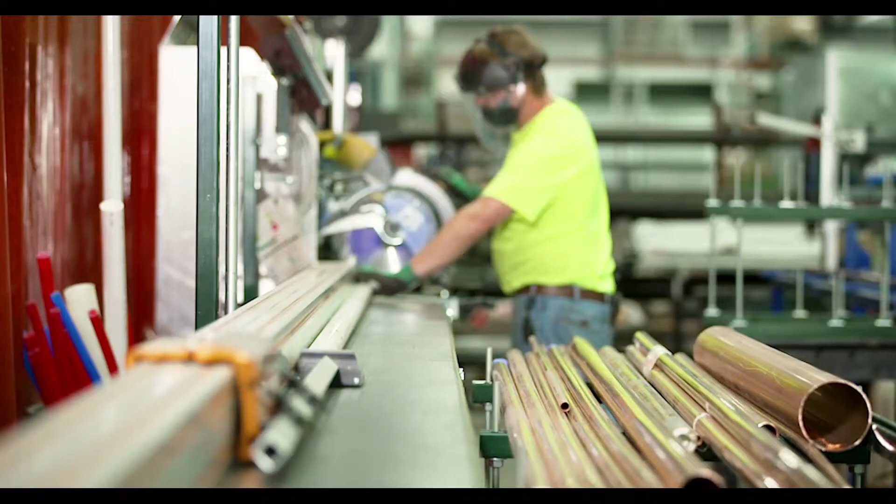So Tweet Garot is a 125-year-old mechanical contractor with approximately 800 employees. We're one of the largest contractors in the Midwest and very proud of our commitment to lean construction and innovation.

We're moving forward under the following premise. You cannot optimize construction until you standardize it, and you cannot standardize it until you productize it. So that has been our focus, creating a database of constructible parts and pieces that contain contextual data that we can add seamlessly into the building model.

Everyone's talking about maximizing prefabrication or off-site construction. Now the buzzword is modular. That's all great, but most of that happens outside the model. An engineer designs it one way, it's constructed or prefabricated by a contractor outside the model.

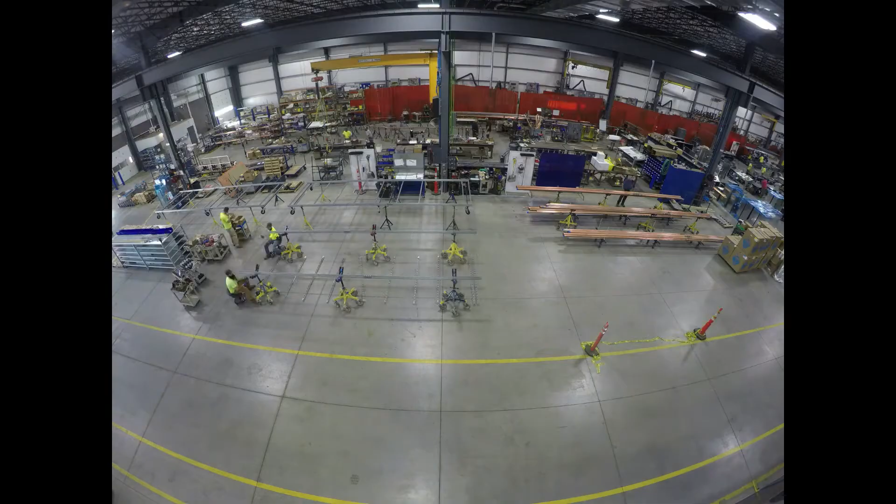The real disruption to our industry will be when a module or a product not only is standardized, but configurable, and then, lastly, with data attached to it, both digital and smart.

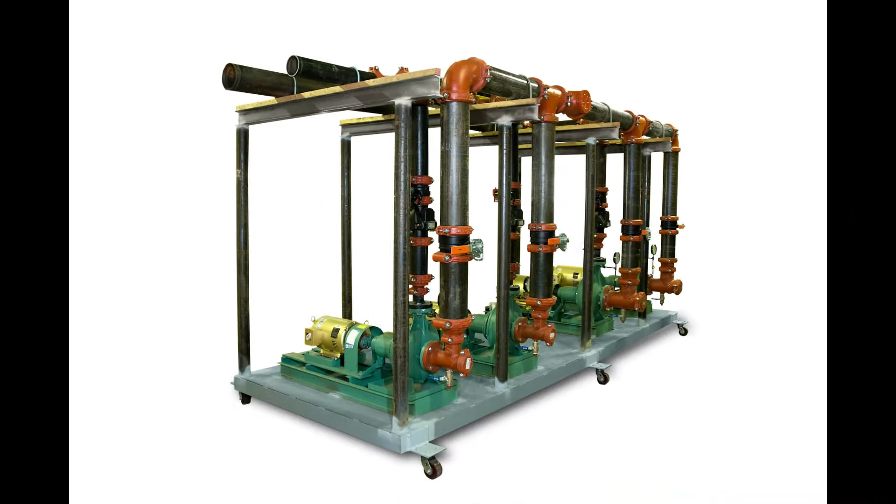When we're starting off with a design build contract, our internal engineers will create the model and then begin to populate it with the design content. They'll add the ducts, the pipes, the VAV families. That will all be generated in-house and placed within the model at that time.

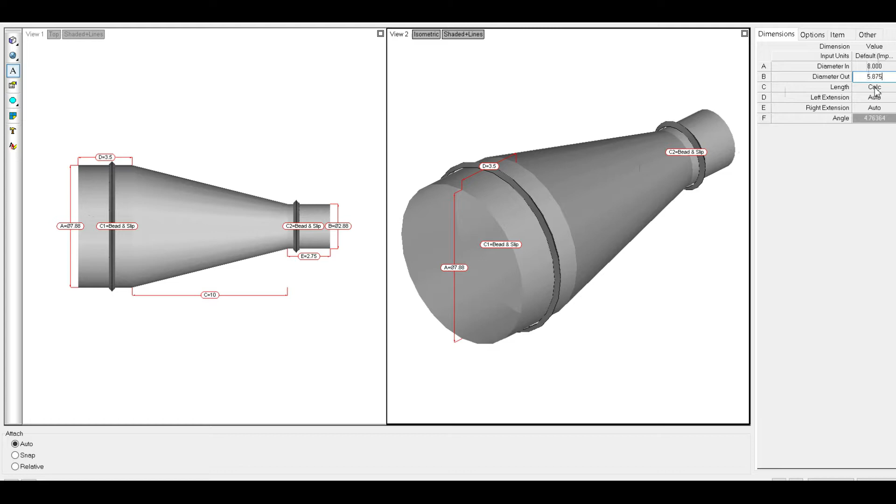Bid spec is the more traditional form of construction, and that is where an external consulting engineer will create a model and begin to populate it with content, usually the same kind of content, but they can put it in different ways and in different locations.

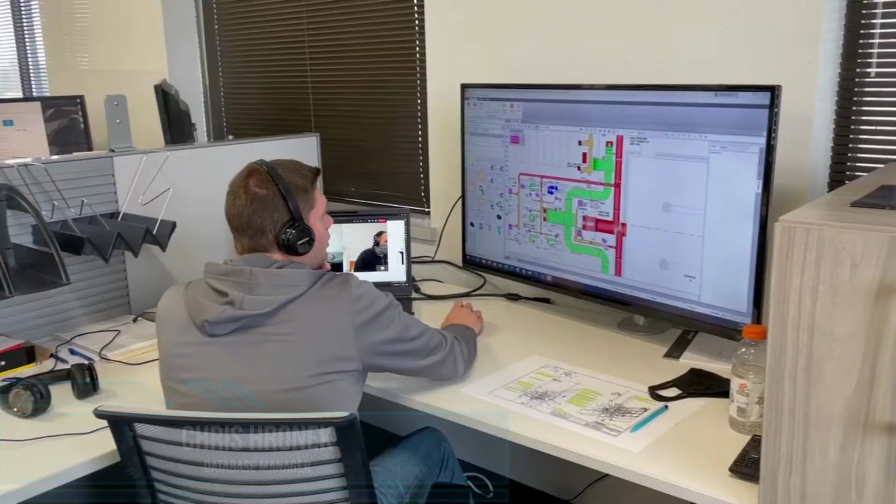We are integrating estimating into the model. We're starting with the idea of this streamlined approach of doing as much as we can with what we get. It just makes sense that we're not rebuilding it, like we've talked about earlier. If the estimators can estimate inside the model, it makes sense. We're using those standard parts and pieces that we've determined and we know work in the estimate. So by having our standard library, we're able to use that standard library to estimate from.

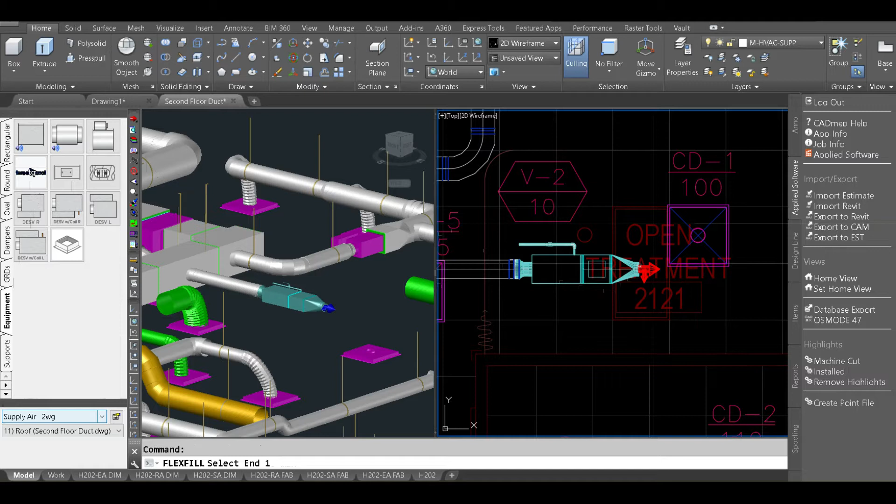So with us building our own parts and pieces and constantly managing and updating them as they go, it allows us to use the same standard parts so pieces can be represented the same each and every time we use them. Us building our own allows us to know that we're using the correct content, and it allows for that seamless data flow.

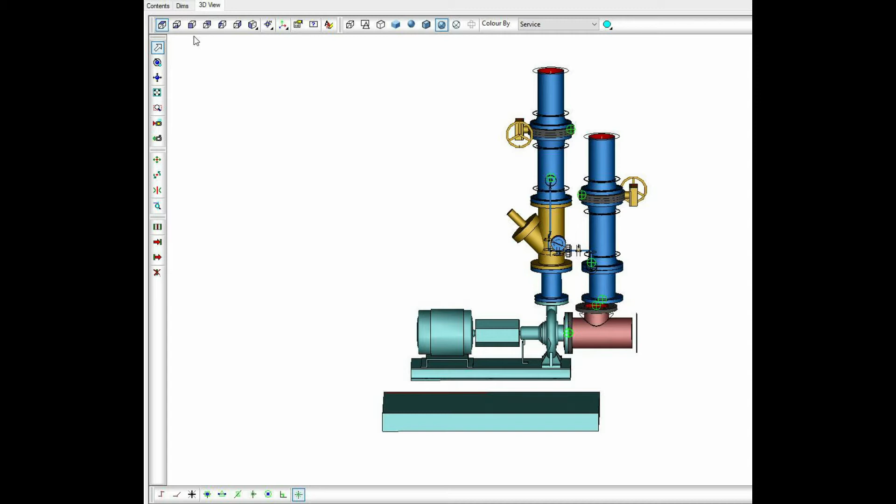For a consulting engineer, their product is that drawing package. So there may be information within the model that is not on the drawing package and therefore not verified by that consulting engineer. So we have to check each line of data, each parameter, and make sure that any information in the model matches the drawings, for information that wasn't necessarily reported out on the drawings.

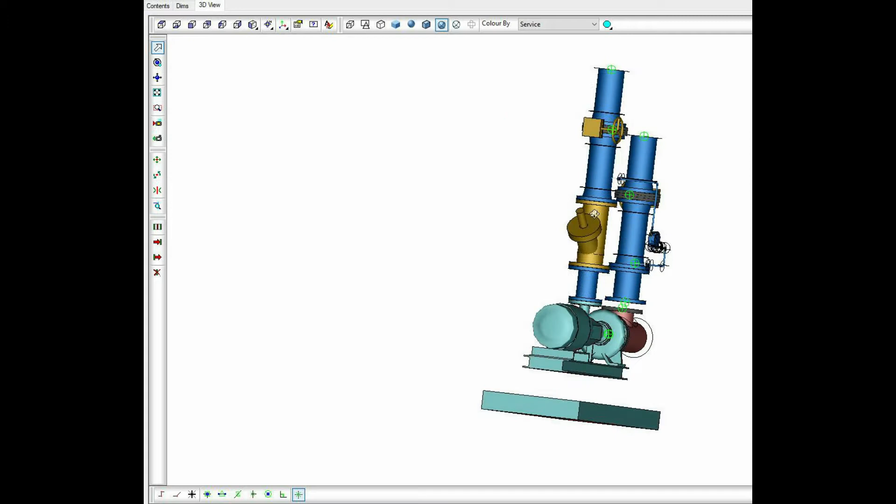A lot of times when you receive an outside model, there would be a disclaimer saying the data within this model is not verified. Please reference official documents. And that's the way it has to be done, because there has to be one source of truth. And right now there's no real set method for verifying data within a model or signing off on it.

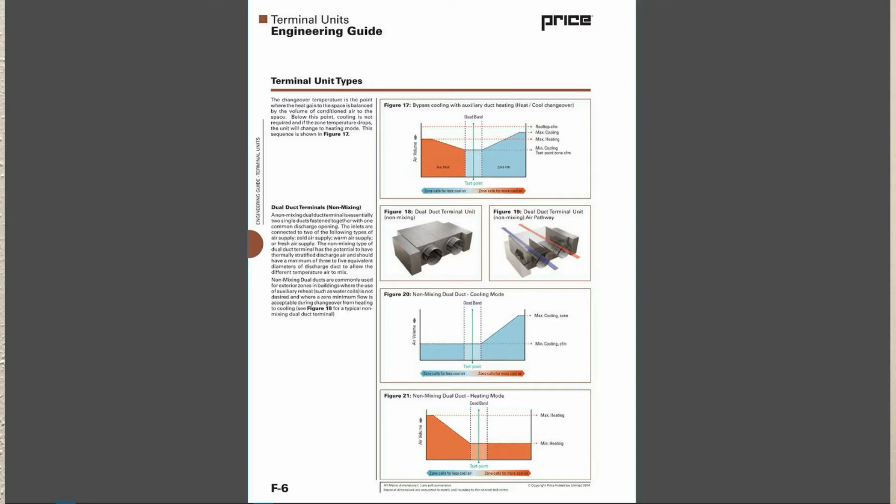So the information that can be integrated with a VAV within the BAS system in the model would be the end deliverable for the customer, having all information associated with that VAV digitally in the model for the life of the building, containing the design parameters, any kind of service requirement, and also maintenance.

The biggest hurdle to eliminating this rework generated by double checking or recreating is the fact that there is no standard location for that data. And because there's no standard location for that data, there's no standard checks and balances for that data.

In the case of a VAV, one engineer might call it design airflow, another might call it cooling airflow, right? And if you don't know which of those two parameters to check or to verify, both of them have to be checked or verified, or both of them have to be created, or you have to go search through because maybe they called it total CFM.

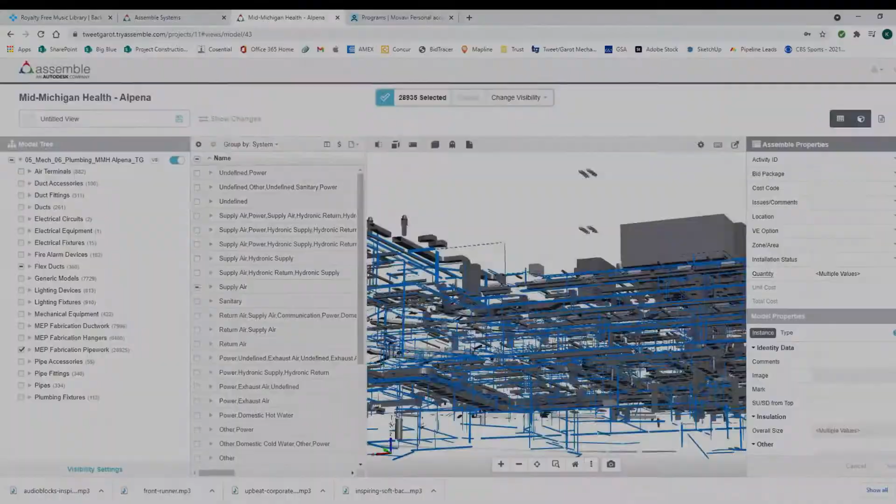You just don't know. We need some form of standard location, and from that standard location, we can create a list of standard checks to verify a model. And until those things are established, we're going to have to double check everything. I would suggest the establishment of some industry standard for data within a model. There have been a couple of attempts, but neither of those have really addressed the location of data, the verification of data within a model.

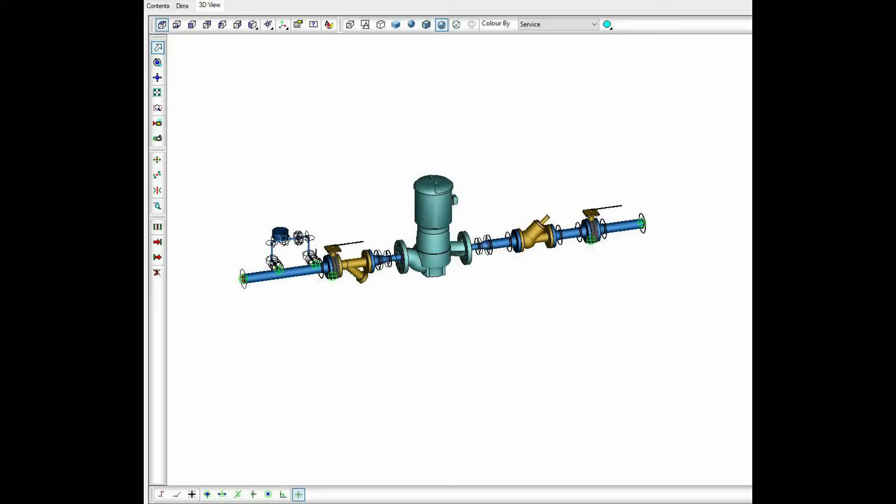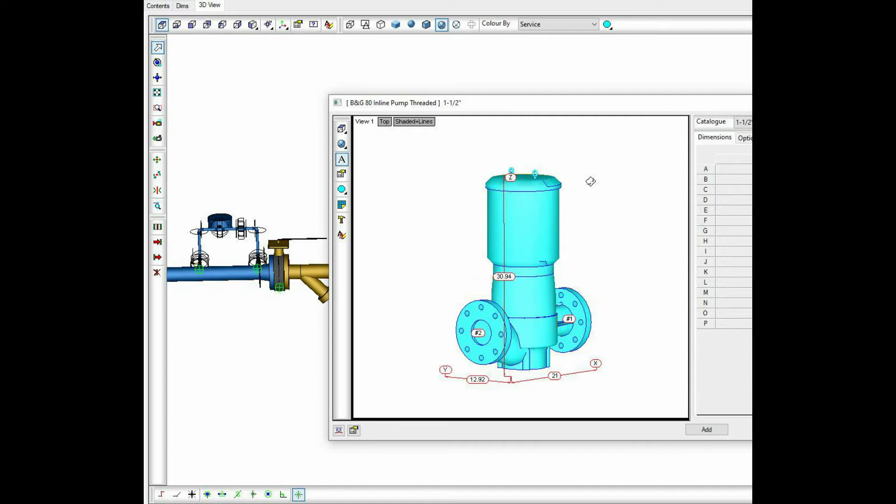So that may be a consulting engineer working with a design build contractor to establish their own standard location and verification of data. Or it might be an industry standard. If it's not industry-wide, whenever you're working with a partner outside of that established standard, you'll have to verify their data, and that invites rework, that invites wasted time in going out and double checking people's work.

Because anytime an engineer is inputting data or making a decision, they're telling the model how much airflow is going through this VAV, and then another person has to go back and double check it. That's rework, right? Anytime they have to go out and reference an external document versus being able to reference that exact object within a model, that's wasted time.

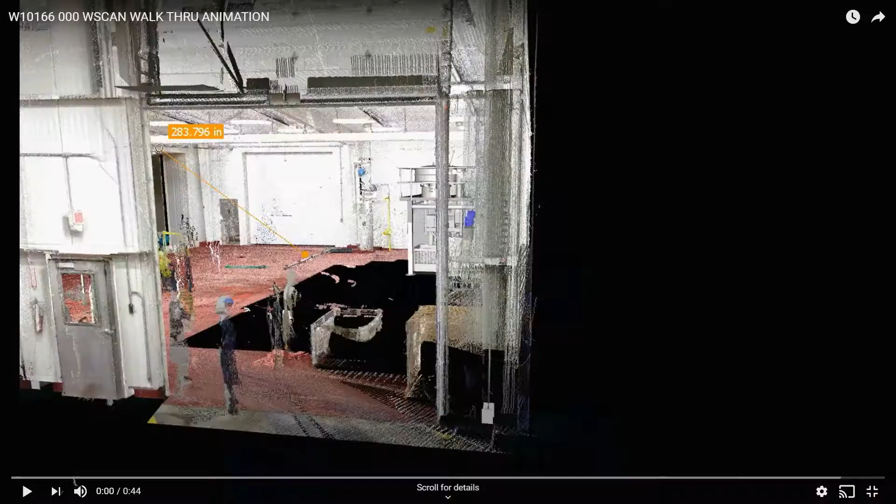And so if we're really looking to eliminate as many aspects of waste as we can, we need a standard location. So this lack of ability to verify, certify data within a model or to trust the data within a model leads to rework in many cases. Specifically to the BIM workflow, it may be that prior to coordination, we have to double check the dimensional data within a Revit family or a BIM family.

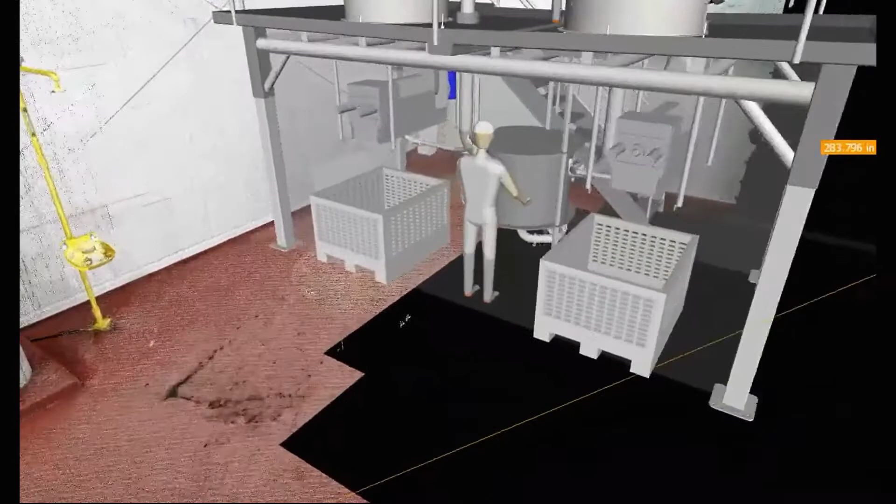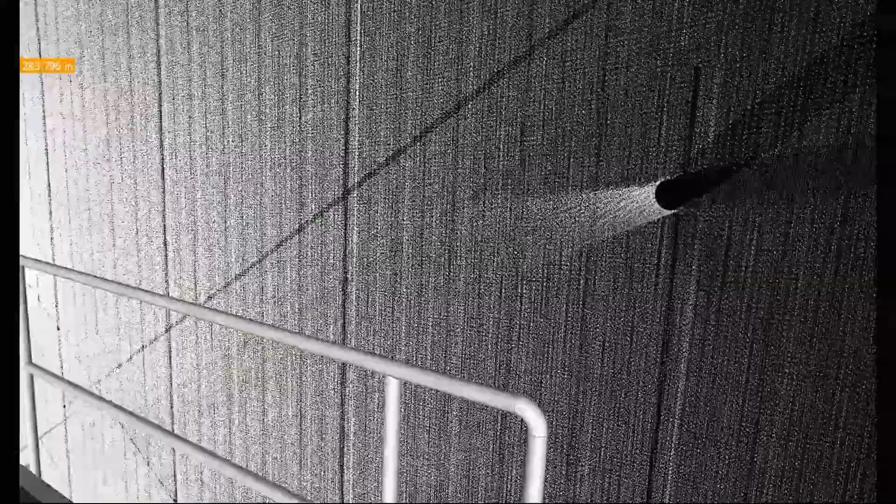And it continues on past that, because there may be information in the model that we don't trust, and that leads to further errors down the line in construction, and it could lead to rework in the field itself, not just within the office. I think some prime examples of how we are making things better is using standard deliverables in every aspect, which has been a collaboration of families and parts that we're continuing to use across projects.

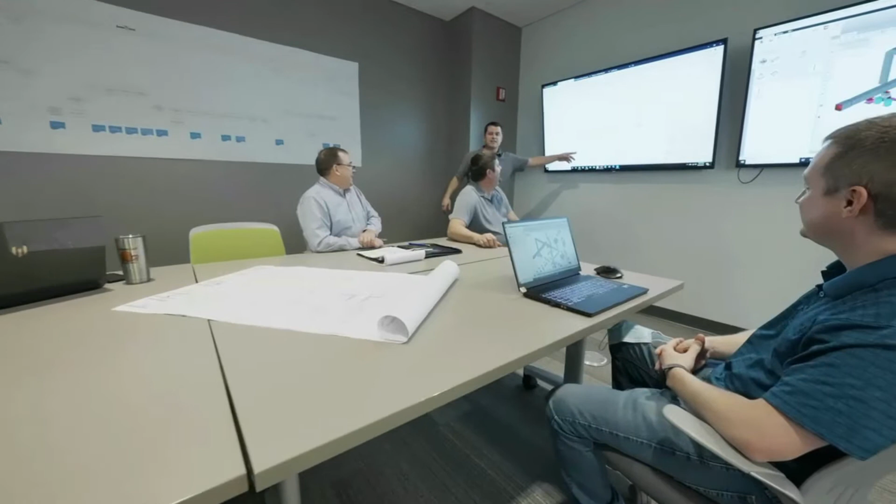Collaboration is helping on multiple different fronts depending on who we're having it with. Internally, collaboration helps amongst the team to get on the same page and everybody to be working together, and different ideas spark different solutions, which I think empowers everybody on the team to be better and make them want to do more.

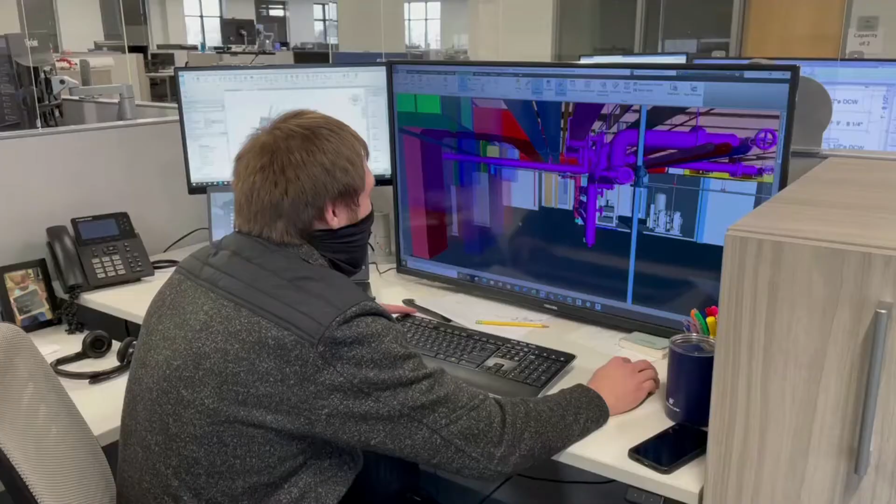External collaboration that we're having between engineers, where we get a model that maybe some people are talking about starting over because it's not a good model or it's not the right results, the collaboration we're having with those engineers is they want to give us a good deliverable. They want to give us something that we can use. So we've had, in a few cases, good conversations with consulting engineers about drawing more like we want as a subcontractor or a trades partner.

I think in this mindset, like we had previously discussed, of constantly wanting to improve, that makes all the troubleshooting easier when it's not just one person from the top or from the bottom trying to drive an initiative. The teams are seeing the benefits of working together and collaborating on issues, so that makes troubleshooting easier to come up with answers from multiple different people to get to a better solution.